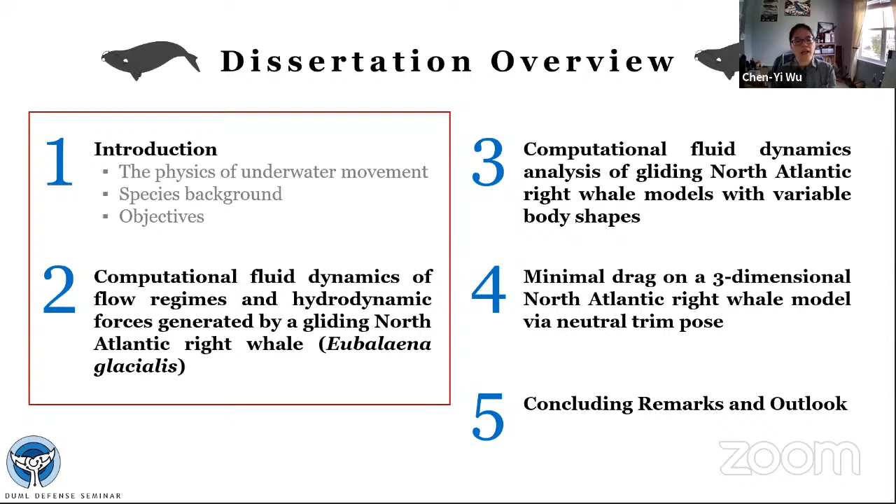So let's get started.

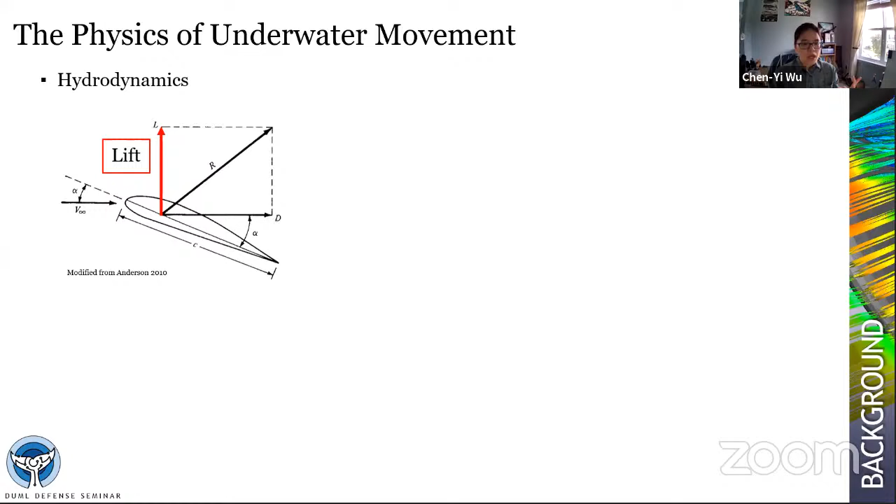So the strength of drag is determined by fluid density, the shape, and also how fast it moves. The smooth outline of the streamlined body shape allows a thin layer of fluid to attach to the surface. Within this layer, the flow remains laminar and incurs lower drag. This rule applies to living organisms as well, since they must overcome drag to move forward in the water.

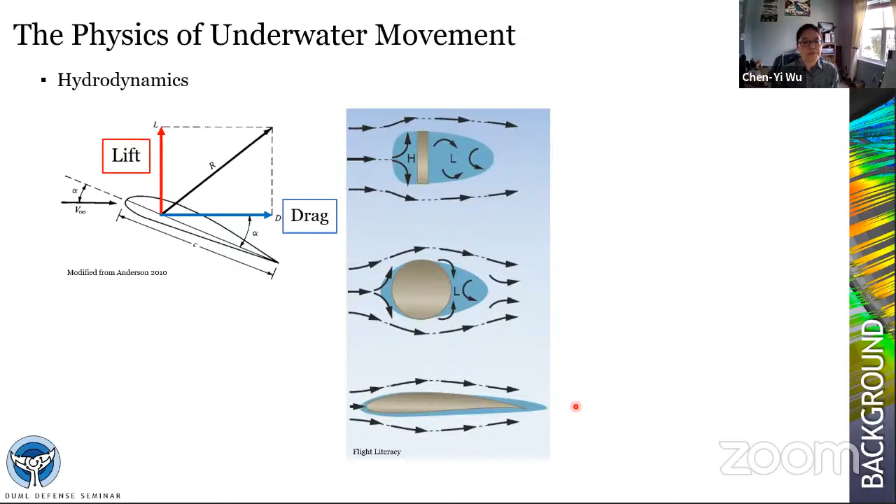Therefore, under selective pressure, the ancestors of modern cetaceans developed streamlined body shapes and transformed limbs to successfully return to aquatic environments. Their morphology delays separation of the boundary layer and reduces drag while they swim.

The total cost of transport is used to estimate the energetic expenditure of aquatic animals, which is the sum of metabolic costs, or say maintenance costs, the rate of oxygen consumed by the animal as they just rest or just respiration, and the locomotor cost, the energy cost for swimming. And I will come back to this in just a second.

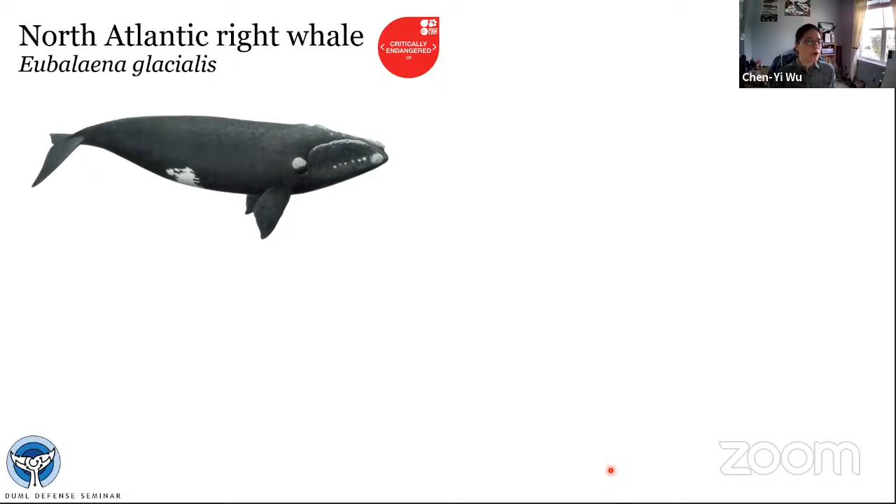The focus of my dissertation is the North Atlantic right whale. The term right whale will be used in the rest of my talk. The right whale is one of the largest whale species. Most right whales are black with some white areas on the belly and chin.

They have patches of rough skin on their head. We call them callosities. These patches, or callosities, are distinctive between each individual right whale. Therefore, this allows scientists to identify different whales throughout their lifespan.

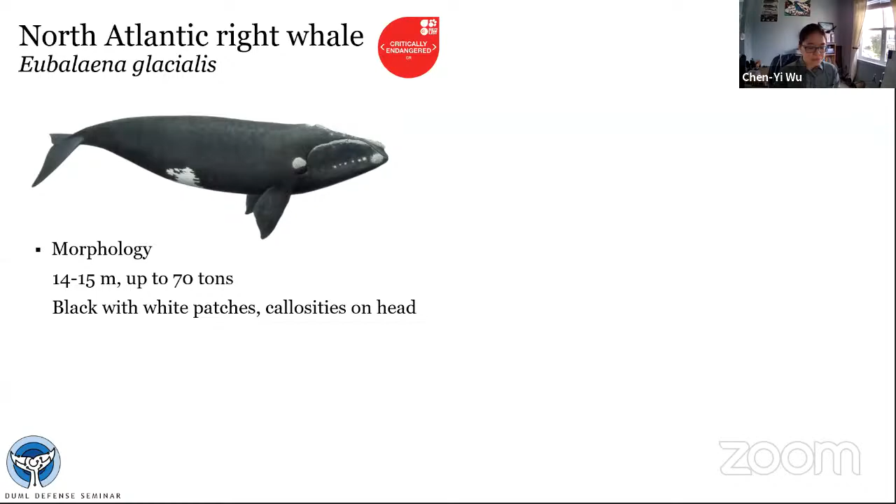In summer, right whales gather in their feeding grounds and forage on copepods with their baleen plates, whereas in winter, pregnant females travel to calving grounds in coastal waters of the southeastern United States to give birth and raise their calves. Right whales were nearly extinct due to commercial whaling.

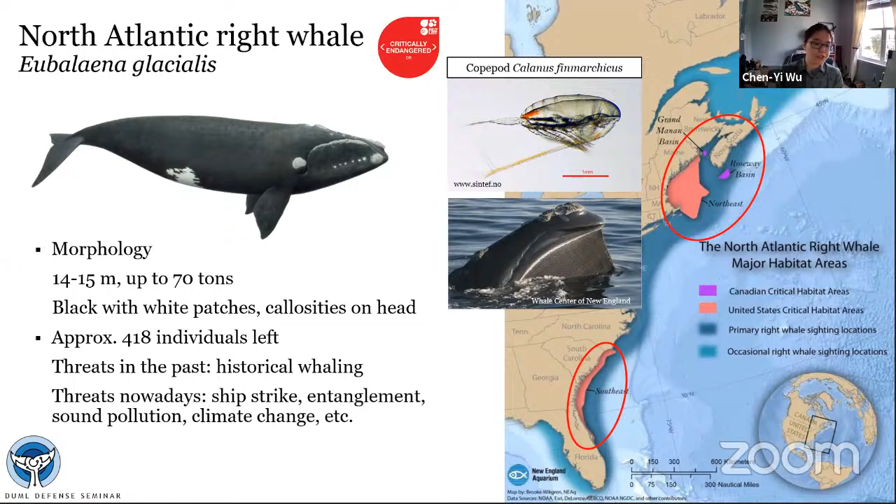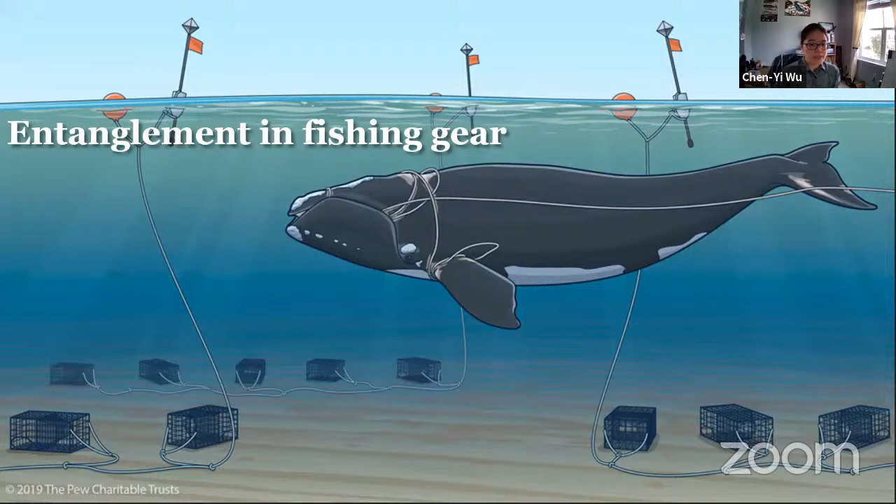However, currently this population is still vulnerable to human activities such as fishery, shipping, and ocean noise, as well as climate change. Among these, entanglement in fishing gear is considered one of the major causes of unnatural mortality of right whales, given the high mortality rates once the animal gets caught in fishing gear, compared to ship strikes. A previous study found that over 85% of the population shows some evidence of encountering fishing gear.

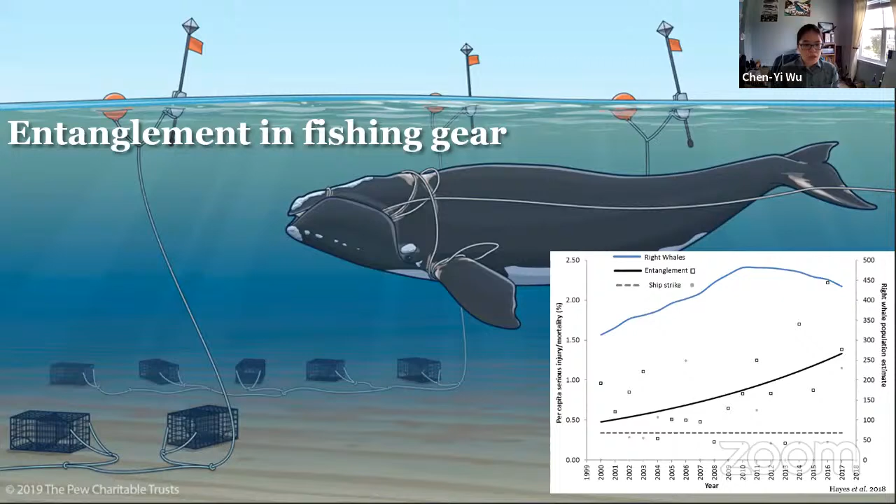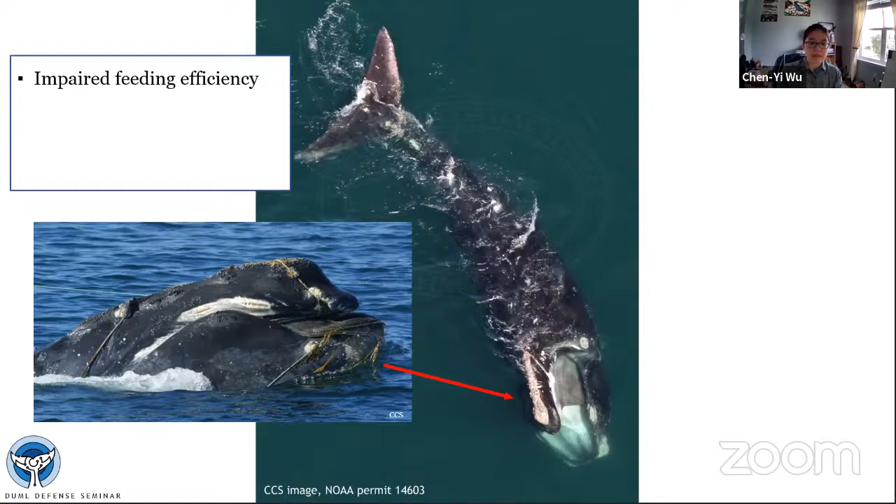Among those affected individuals, over half of them are subject to repeated entanglement, from twice to as high as 7 times. During entanglement events, so we have a right whale here, this animal may end up having impaired physical functions such as reduced feeding capability if the fishing gear is wrapping around their mouth or baleen plates, or injuries due to collisions with fishing gear. Some of those injuries could be lethal and result in mortality of those animals.

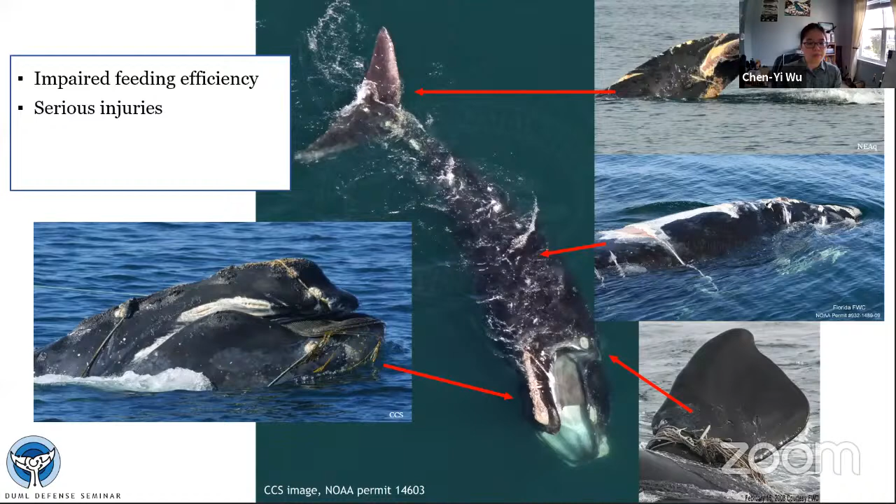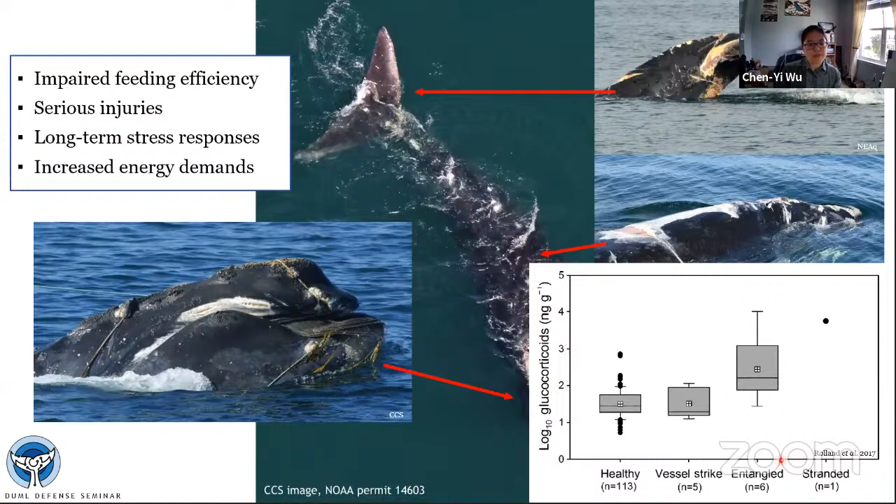Significantly higher stress hormone levels were found in entangled right whales by researchers at the New England Aquarium. Lastly, carrying fishing gear may increase energy demands of those individuals.

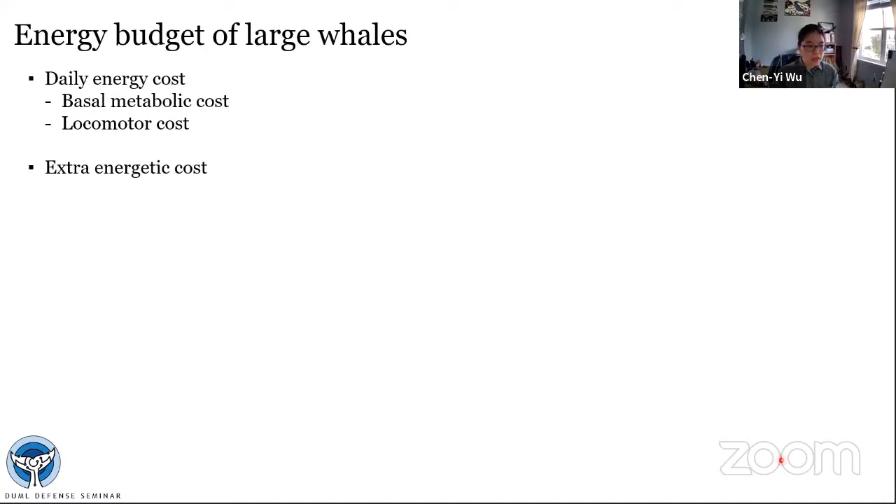Okay, so now I want to talk about the energy budget of large whales. As I mentioned earlier, the daily energy budget of aquatic animals includes the maintenance costs and the locomotor costs. But there are a few other types of energy costs associated with some critical life history events, for example, annual migration of some large whale species, as well as reproduction for females. And also, here I want to draw your attention to entanglement.

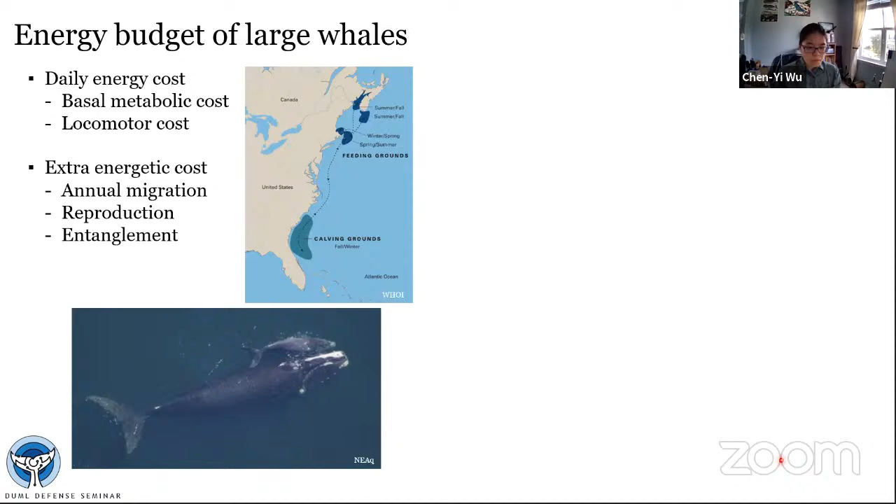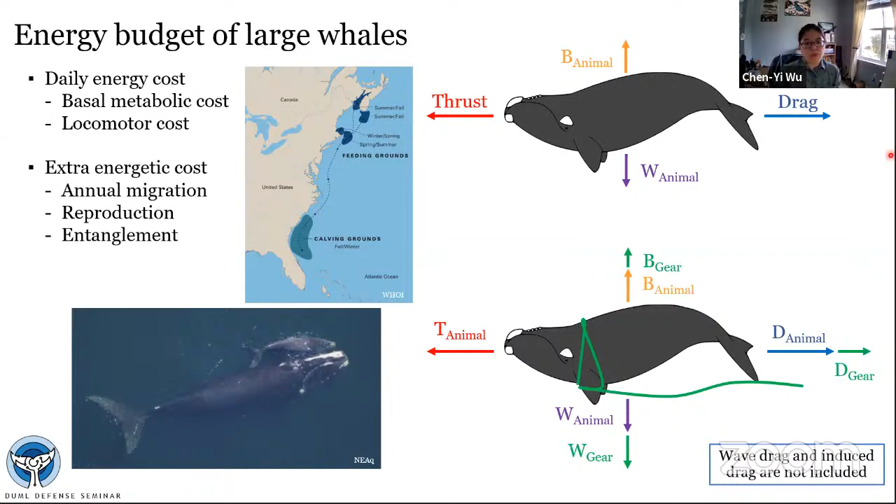So for a non-entangled right whale, free swimming without any gear attachment, its body weight will be balanced by the buoyancy of the animal. As it propels itself, drag will appear, and therefore this animal must generate sufficient thrust to overcome drag. However, once it becomes entangled, the attached gear will also create buoyancy, weight, and drag, and inhibit the movement. This means that the affected animal has to spend extra energy to overcome these additional forces.

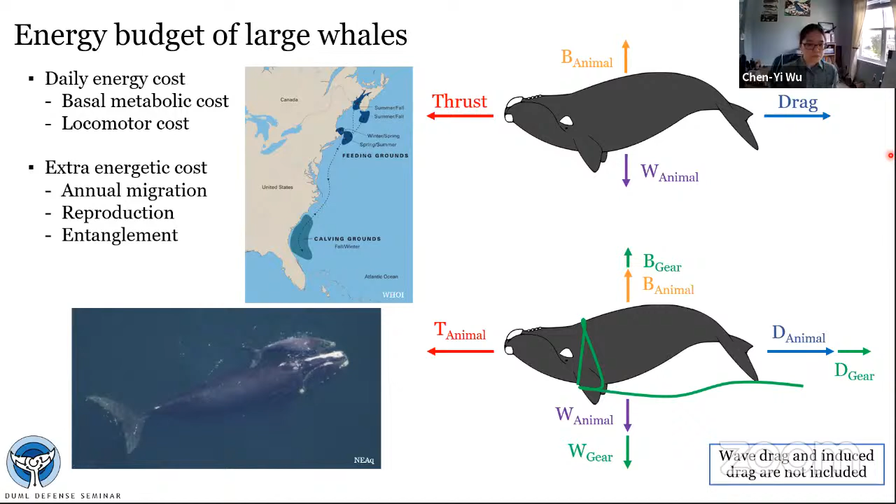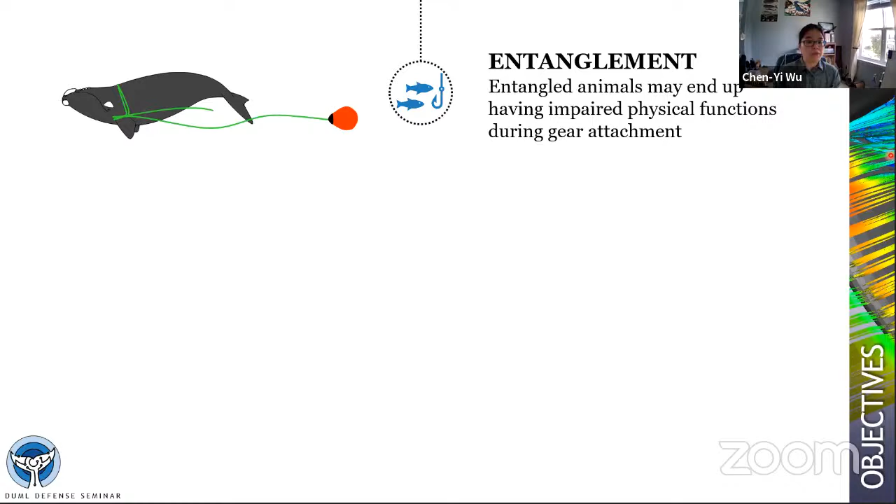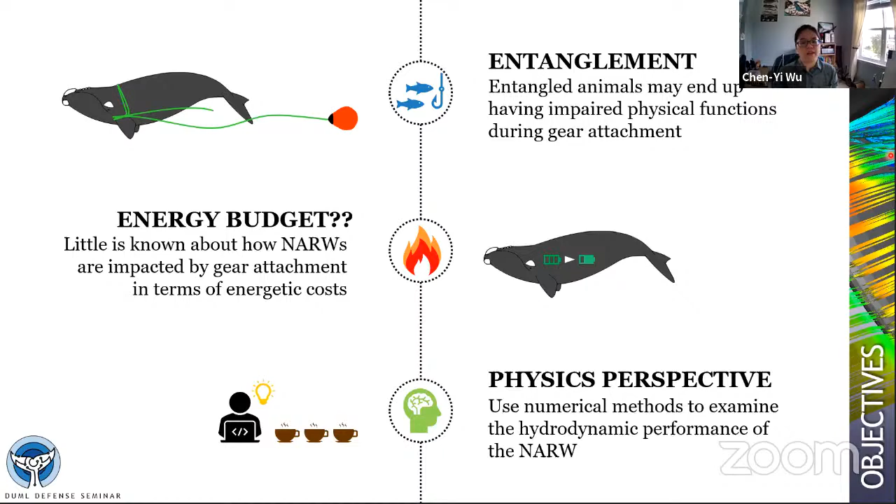So here's the roadmap showing how my research questions were developed. As shown in previous slides, entanglement causes a lot of problems for right whales. However, little is known about how the energy budget of these animals is impacted by such events. Therefore, with an engineering background, my dissertation aimed to understand the hydrodynamic performance of North Atlantic right whales from a physics standpoint.

Knowing the energetic cost of right whales is of interest because once the animal cannot intake enough food, it may not only metabolize its storage fat, but lose its ability to accomplish tasks other than survival, reproduction, for example. And the birth interval for female right whales has increased from 3 to 4 years per calf to over 10 years, and ultimately affects the population.

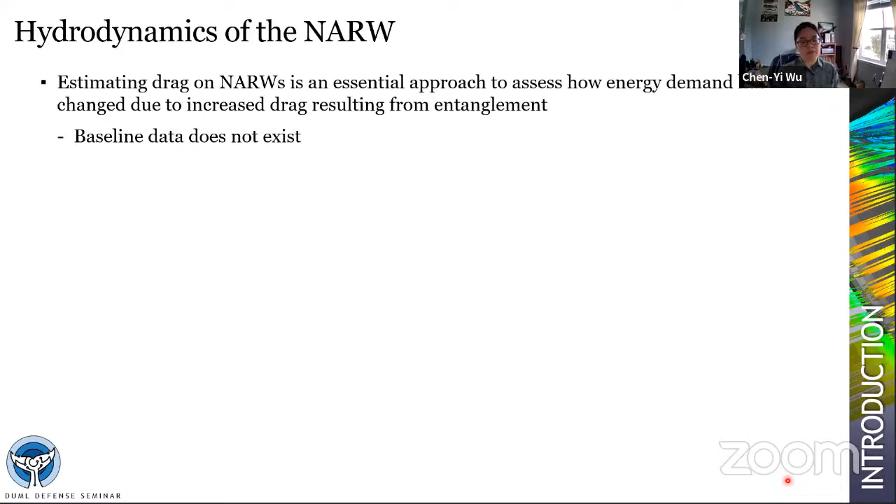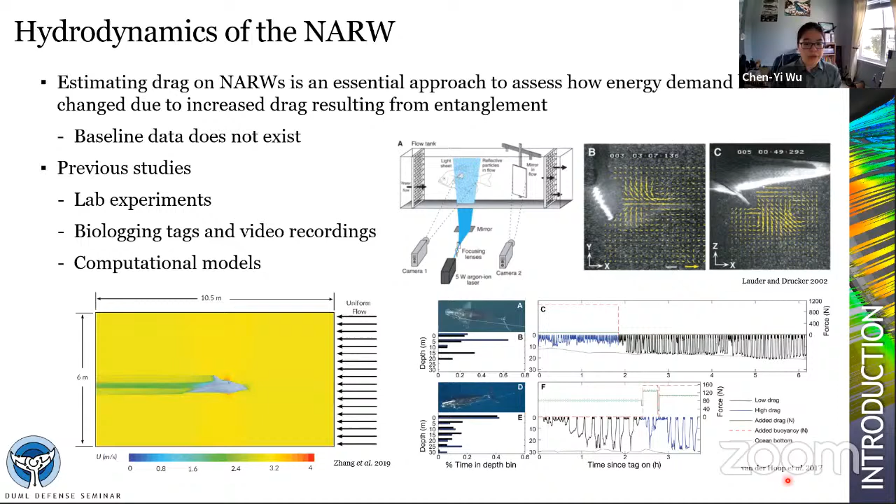Therefore, estimating drag on right whales is an essential approach to assess how energy demand has changed due to increased drag resulting from entanglement, but the baseline data for right whales does not exist. Several attempts have been made to estimate drag on aquatic animals, for example, conducting flow tank experiments on some small species like fish, or recording kinematic data of animals with digital tags and video recording, as well as numerical methods.

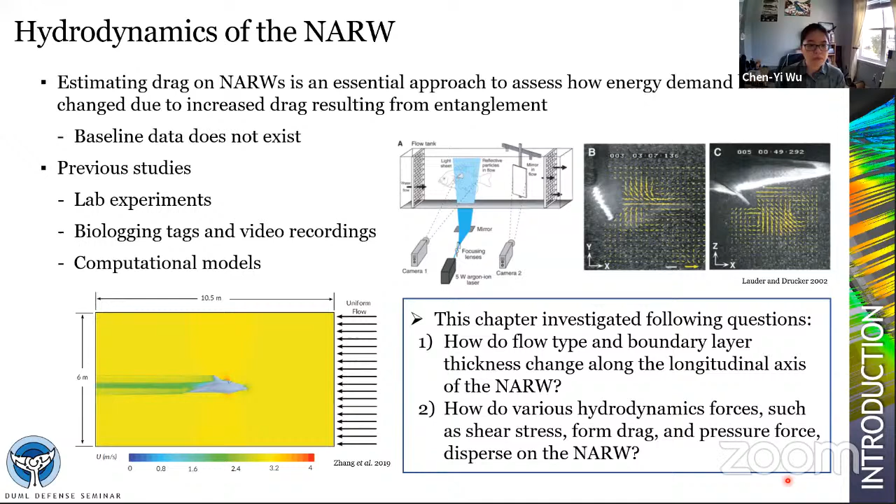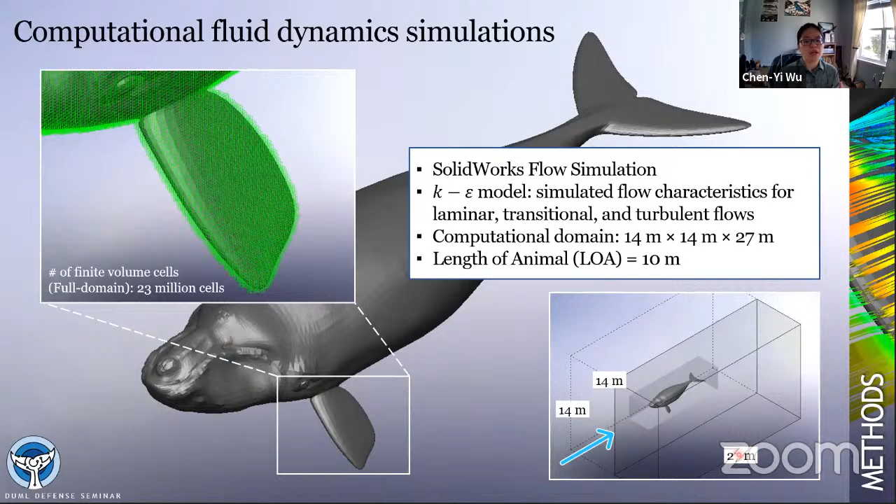One advantage of using numerical methods is that the morphometric parameters of the 3D model can be precisely measured by the software. And those measurements are essential while calculating hydrodynamic forces on the animal. Another advantage of using computer solutions for hydrodynamic analysis is that it allows me to run parallel simulations under a controlled circumstance, such as modifying one variable at a time.

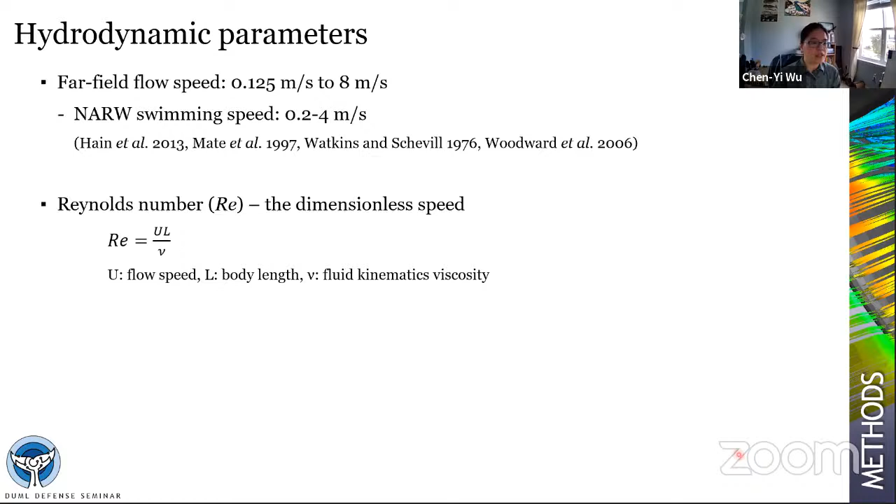So to estimate the baseline forces on the right whale model, speeds covering the known right whale speed range were applied to the CFD model as the flow velocity, while the right whale model remains static in the fluid domain. The dimensionless speed is given by a Reynolds number, and drag coefficient was used for reporting dimensionless drag. By calculating those dimensionless parameters, I was able to compare between different simulations.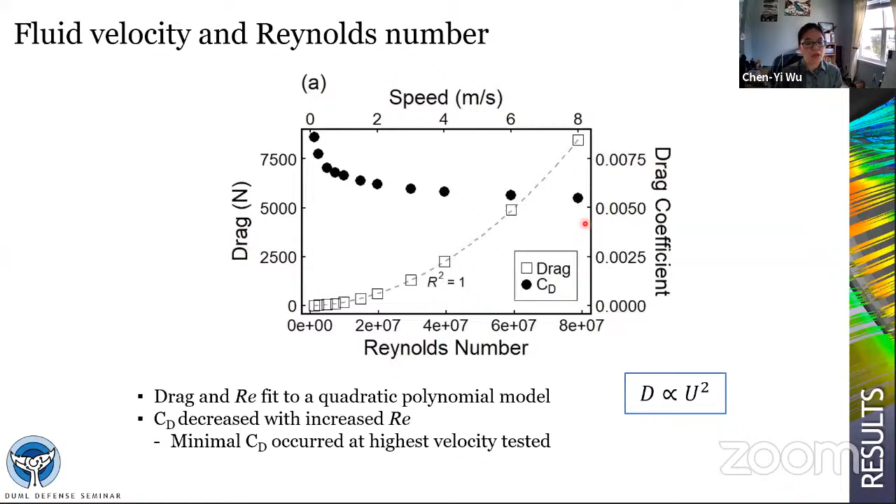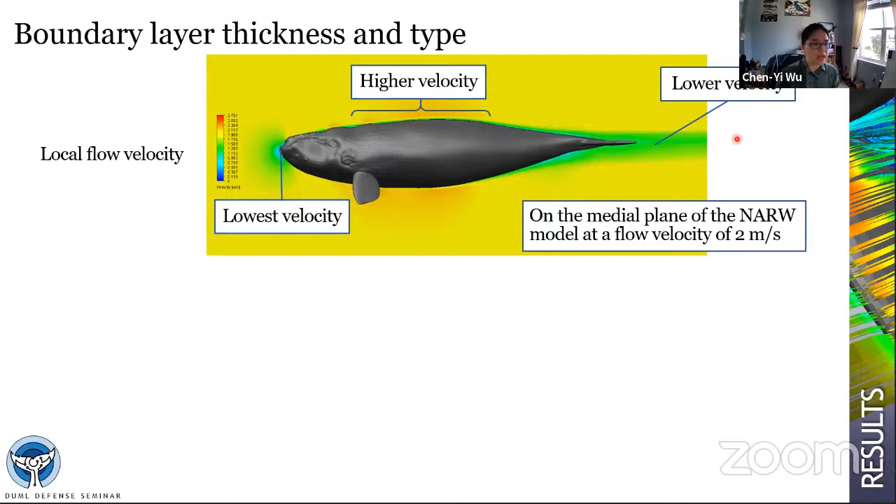Local flow velocity on the medial plane of the right whale is shown here. The boundary layer attaching to the animal can be distinguished from the surroundings by the visualized flow velocity over the animal. Here is a very thin layer of green color on the animal, and that suggests that the flow in those regions is slower and laminar. The thickest boundary layer was found at the lateral side of the peduncle, just after the body, whereas the boundary layer around the appendages, like flippers and flukes, was the thinnest.

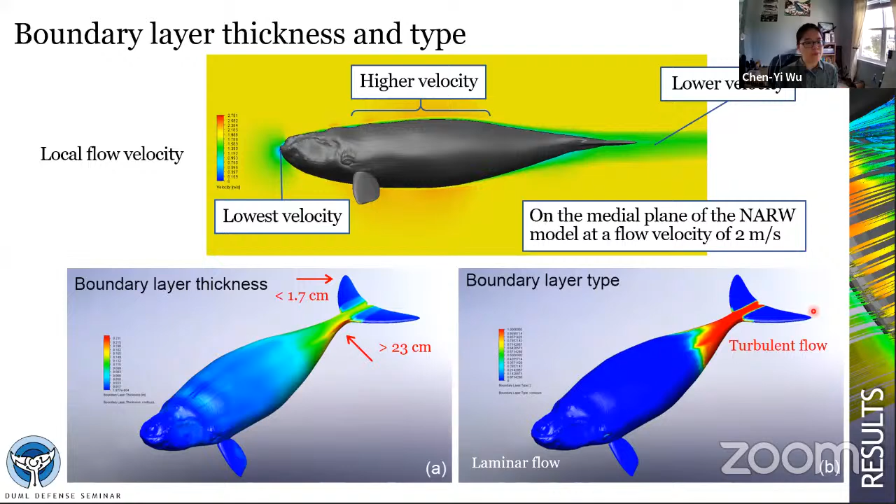Flow was laminar from the rostrum, the tip here, to approximately 60% of the animal length, and was fully turbulent from around 80% of the animal length to the fluke notch. Note that laminar flow occurs at the surface of the fluke, just outside of the body wake region.

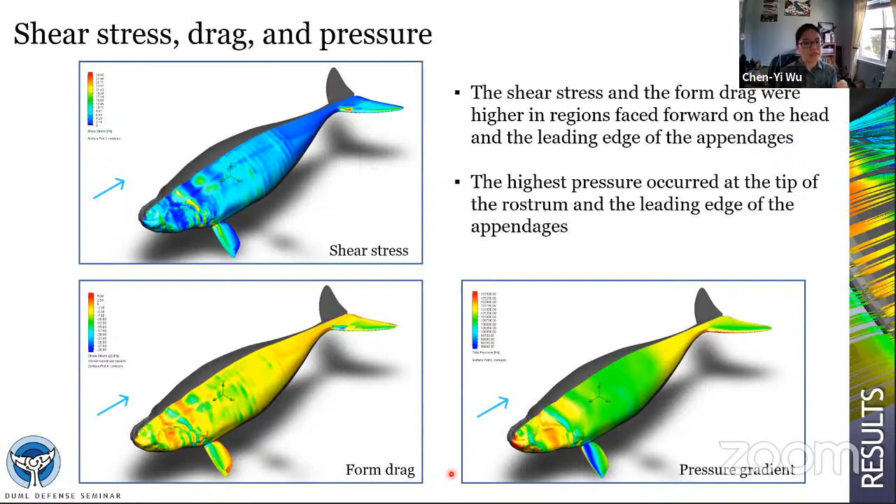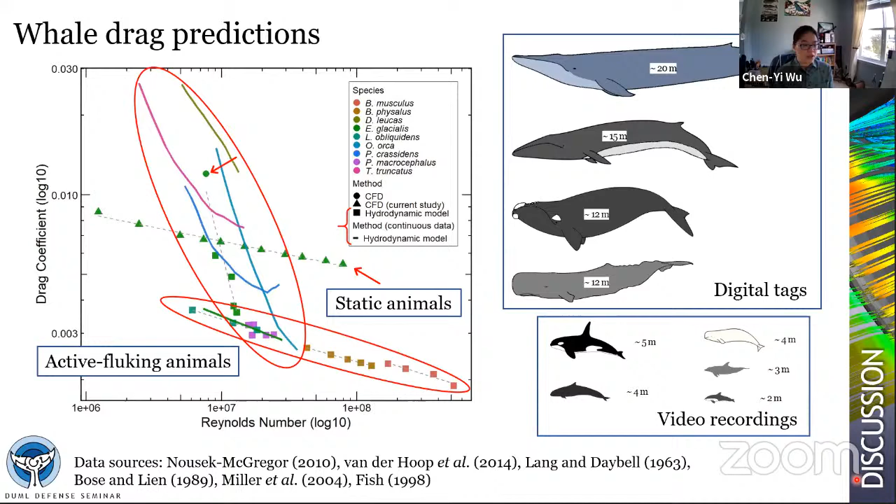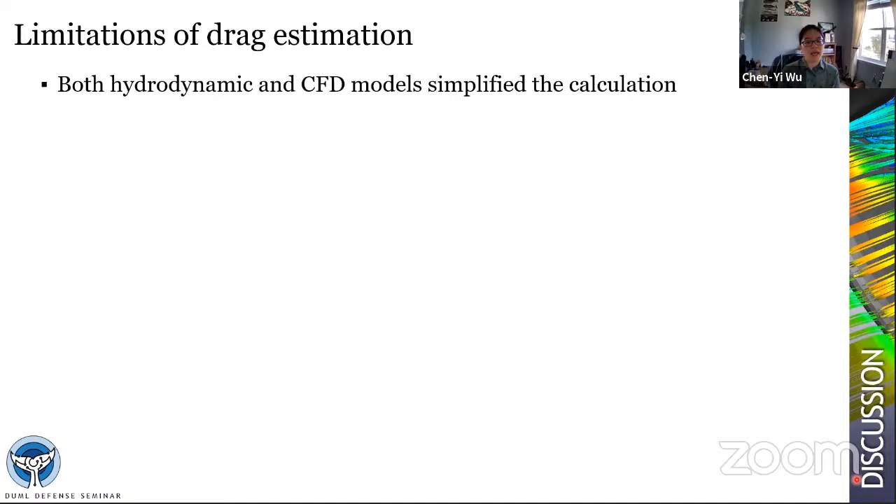Therefore, it is important to bear in mind the simplified calculations undertaken by both hydrodynamic and CFD models. For example, in the cases of estimating drag with hydrodynamic models that use data collected with video recordings or digital tags, the outcome forces comprise not only the small scale flow circulation on the animal, but also other factors such as waves if the animal is close to the surface. In addition, those physical factors in the real world are ever changing, which implies that such drag estimations are correct, but only under certain conditions, not others.

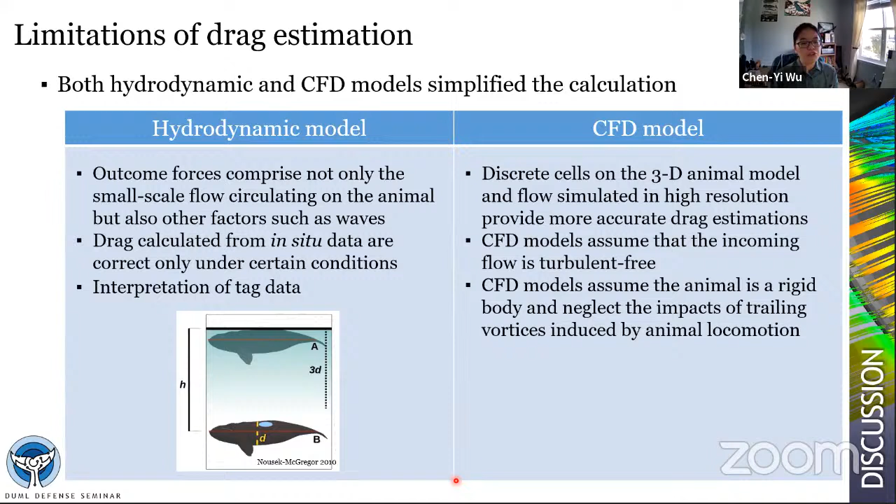Lastly, interpretation of tag data may be performed differently between research groups. On the other hand, CFD models provide more accurate drag estimation because the morphometric parameters of the animal can be precisely measured by the software. However, this model assumes that the incoming flow is turbulence free, which apparently is not the case in nature, and that the animal is a rigid body without flexibility or maneuverability, and neglects the impact of trailing vortices induced by animal locomotion, which again is definitely not the case because they are animals and they do all kinds of different behavior in water.

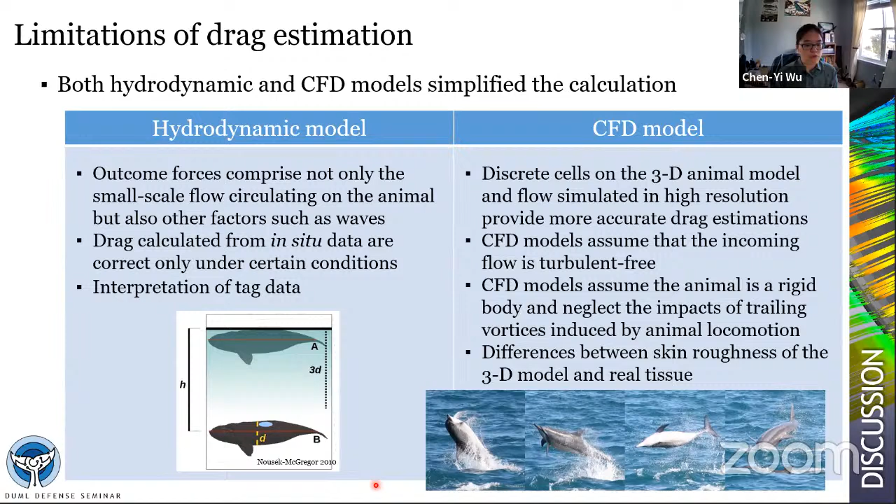Lastly, differences between skin texture, or roughness, of the 3D model and real tissue suggest bias in the calculation of friction force. To sum up, this is the first comprehensive study of drag and other hydrodynamic characteristics of right whale through a CFD approach. Force distribution generated by CFD simulations suggests that hydrodynamic forces on right whale vary with position on its body due to the irregular outline of the animal. This finding prompts me to wonder how body shape affects the hydrodynamic characteristics of right whale. So a follow-up study was undertaken to answer this question, which will be talked about a little bit in the next chapter.

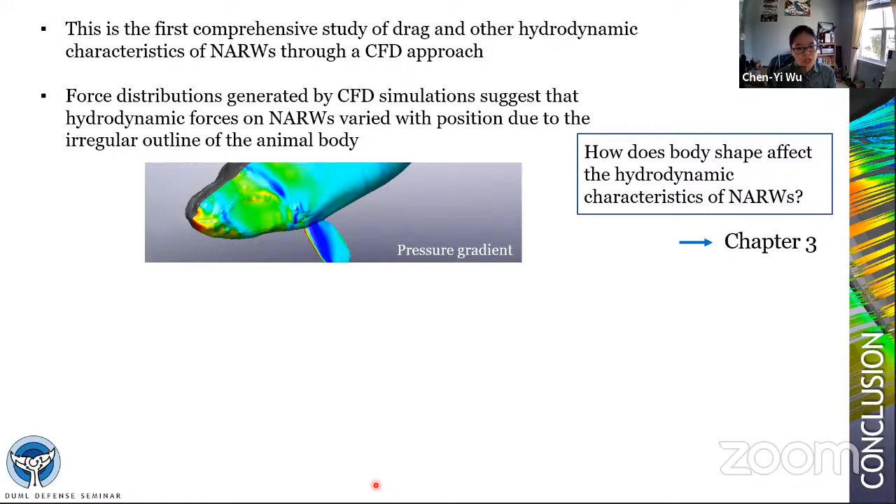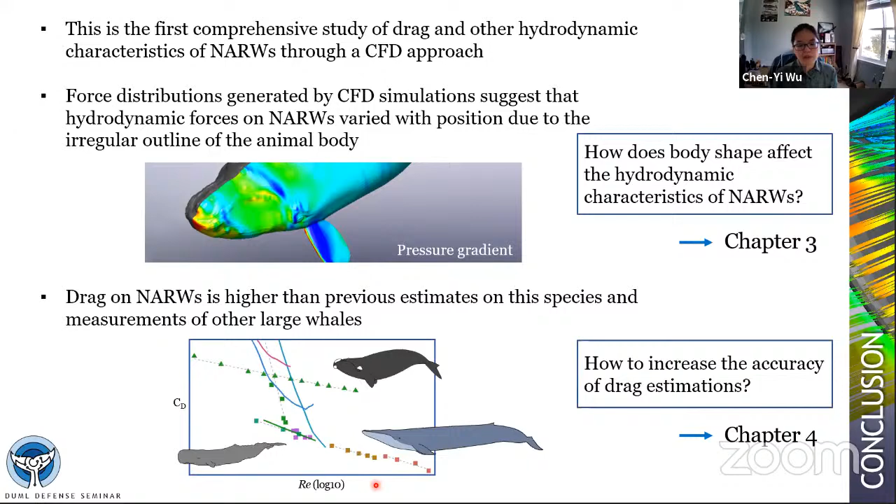Secondly, it was found that drag on right whale is higher than previous estimation on this species and measurements of other large whales. Although a comparison between different models and some limitations were discussed in this chapter, my last part of the dissertation is trying to investigate how we can increase the accuracy of drag estimation while using numerical methods. For the interest of time, in the next 10 to 15 minutes or so, I will only be showing you the key findings of the rest of my work.

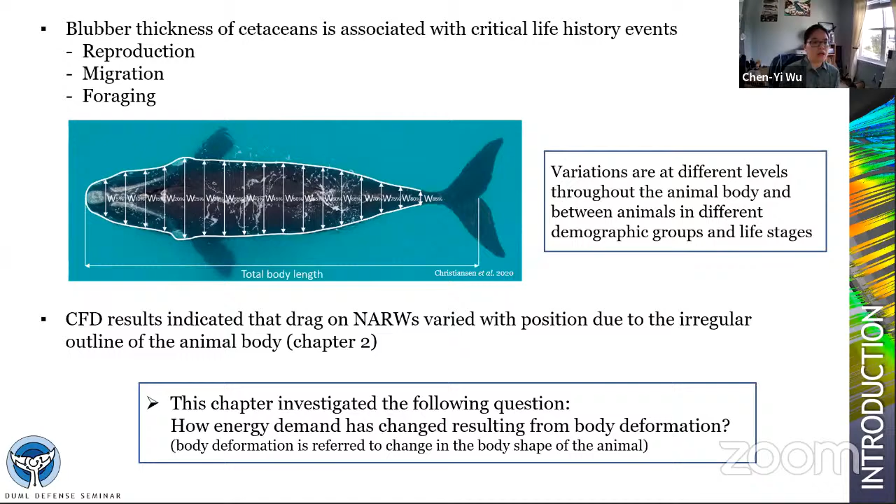So the third chapter of my dissertation investigated the impact of body deformation on the energy budget of right whale. Here, body deformation is defined as change in body shape of the animal, which was found to vary at different levels throughout the animal body, shown in the image, and also between animals in different demographic groups and life stages, such as juveniles or adult females, or whether they are pregnant or not. I used images of an emaciated right whale to modify the original 3D model, thereby creating a right whale model with imperfect body shape.

Given the limited number of archived images demonstrating body shape of emaciated right whales, this emaciated model was not a replica of any specific animal, and it only exhibits the post-nuchal concavity highlighted in the red square, with additional circumferential losses of body fat, based on the photo that I got. Exact changes in the contour of the ventral side, as well as mid-body region and peduncle, were not the focus of this work. Likewise, a pregnant right whale model was built as described in the previous study done by a student in Nowacek lab, and then normalized to the same size for comparison.

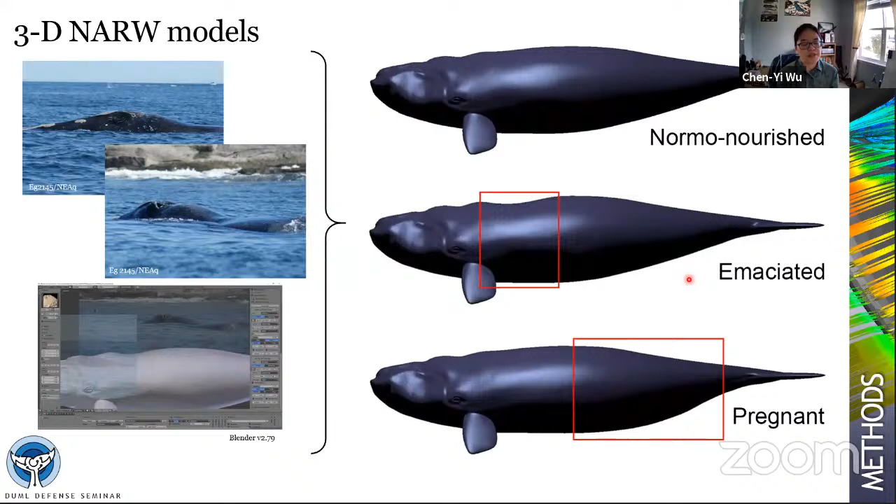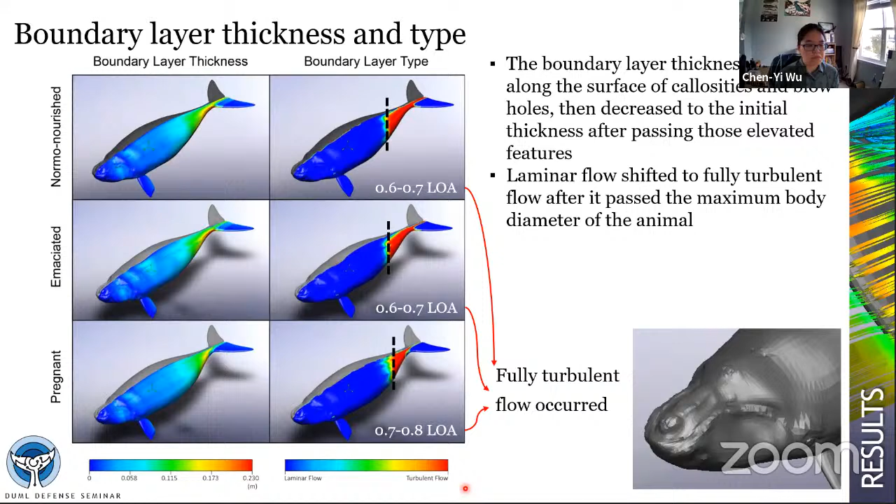Simulation results on all three models show that laminar flow shifted to fully turbulent flow after it passed the maximum body diameter of the animal. However, I noticed that there's a delayed occurrence of turbulent flow on the pregnant right whale model, which could be due to their enlarged girth because they are bearing a baby whale in their abdomen.

Second, the boundary layer thickness and form drag slightly increase within the post-nuchal concavity, which is circled here. By comparison, you can see the color is a little bit warmer, indicating the boundary layer thickness is a little bit larger on emaciated animals. And also you can tell the differences on this figure showing the form drag of the post-nuchal regions of the emaciated animal.

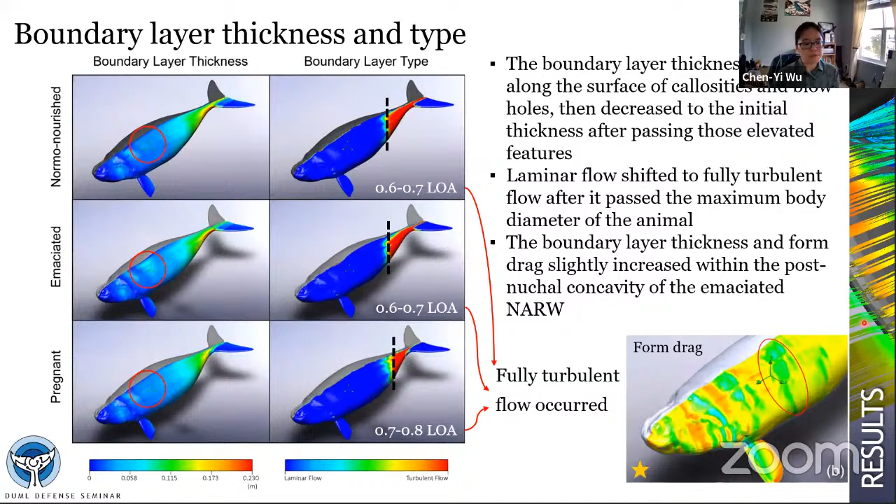Based on the simulation, drag generated by a gliding right whale is influenced by its body shape, but the changes are minor. I found that the pregnant right whale experienced the lowest drag coefficient, which is possibly due to this individual being able to maintain a favorable pressure gradient and thereby delay flow separation and cause lower drag.

Whereas the emaciated right whale encountered the highest drag coefficient, possibly due to the concavity at its post-nuchal region, as shown in the previous figure, with higher drag and higher boundary layer thickness, which increases the surface area that faces incoming flow, therefore higher form drag, and potentially disrupts the boundary layer on the animal.

And what I was not showing here was the locomotive power comparison between the models and some measurements done by previous studies. So by comparing such differences in locomotive power required by the right whale models, only little differences were found. And such differences were even smaller when compared to the total energy expenditure of free swimming right whales calculated by previous studies, considering the energy consumption rate in their foraging ground as well as their cruising speed.

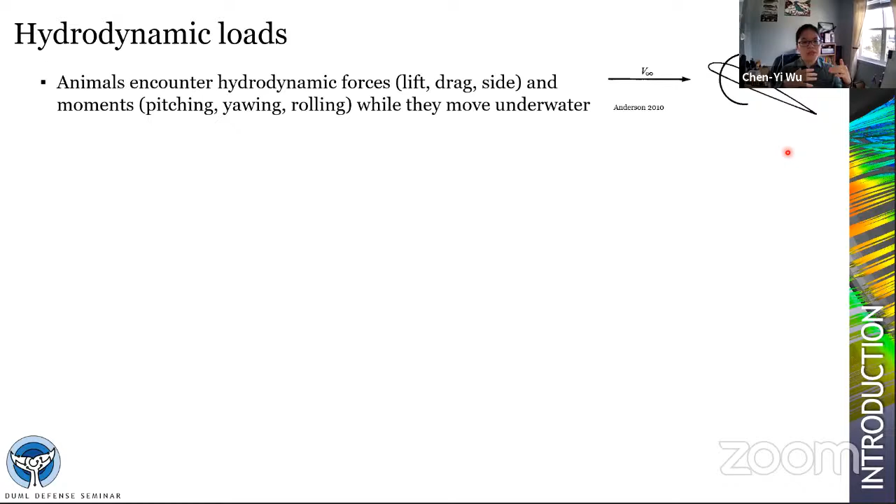So shown here in this diagram, moment is a measure of the tendency to rotate an object about a point or an axis, because the forces cannot be balanced, so the object will tend to rotate. So shown here are pitching moment about the x-axis, rolling moment about the y-axis, and yawing moment about the z-axis.

Aside from the success in morphological evolution I talked about in the introductory chapters, it has been well documented that animals developed a wide range of strategies to reduce energy expenditure in both terrestrial and aquatic environments. For example, formation flights in some bird species and fish schooling, as well as bow riding of dolphins.

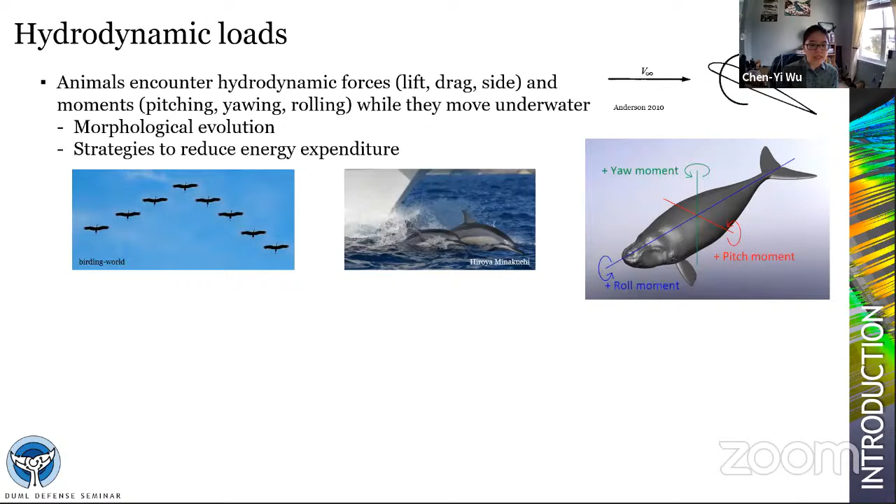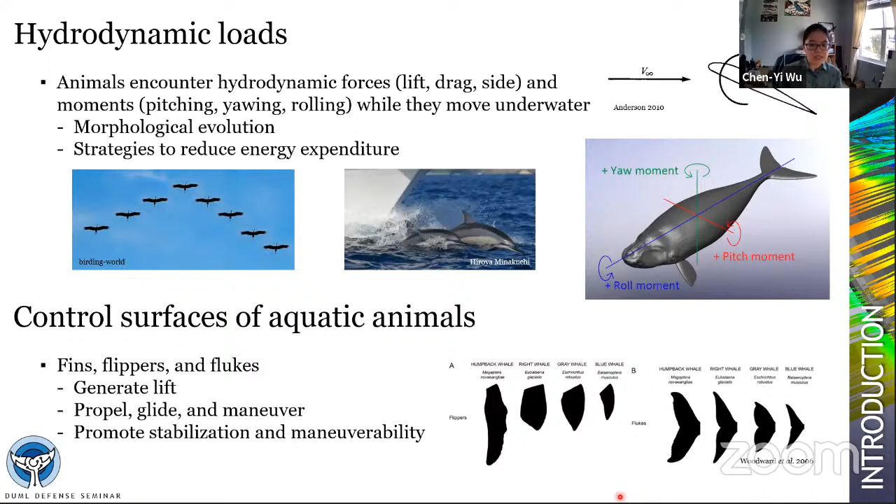And aquatic animals exhibit control surfaces such as fins and flukes for moving in fluid. However, these surfaces not only provide stability and maneuverability, but also additional drag. We call it parasitic loads.

So this diagram shows the hydrodynamic forces on the flippers and flukes of the right whale and the moment arms associated with each force. All moments were calculated with respect to the center of volume of the right whale model, because this model was assumed to have a homogeneous mass distribution, therefore the center of volume is approximately the center of mass, which we use to calculate the moment acting on the animal.

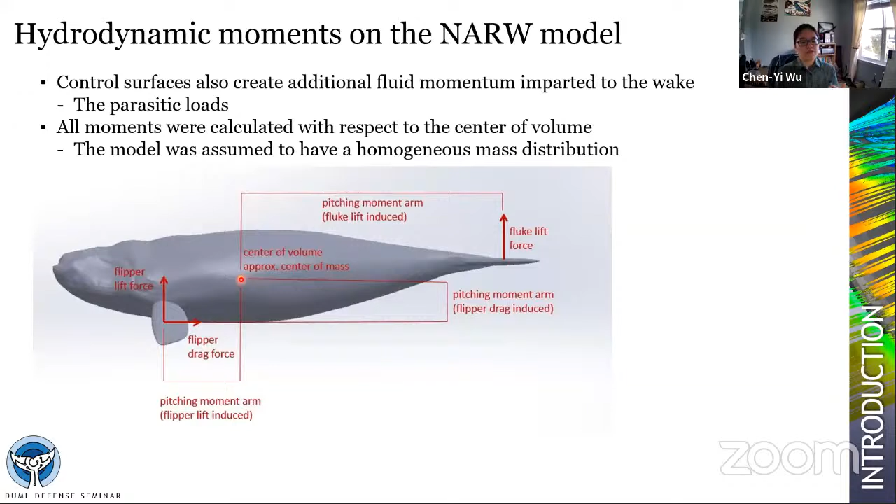I should mention that, in theory, drag will occur on the fluke as well. However, after the body pose of the right whale model was manipulated in this chapter, the fluke drag was approximately in line with the center of volume. So the moment arm vanished and there's no moment resulting from fluke drag.

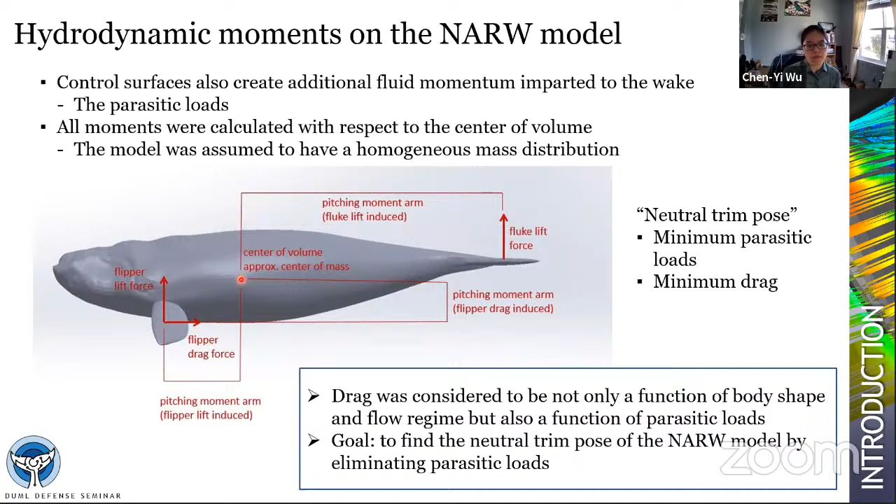A model is considered in its neutral trim pose only if the parasitic loads are minimized. Hence, the goal of this chapter is to find the neutral trim pose of the right whale model by adjusting its body pose. In order to execute different body poses, the mesh model was embedded with multiple bone segments, so its joints can be rotated in certain dimensions.

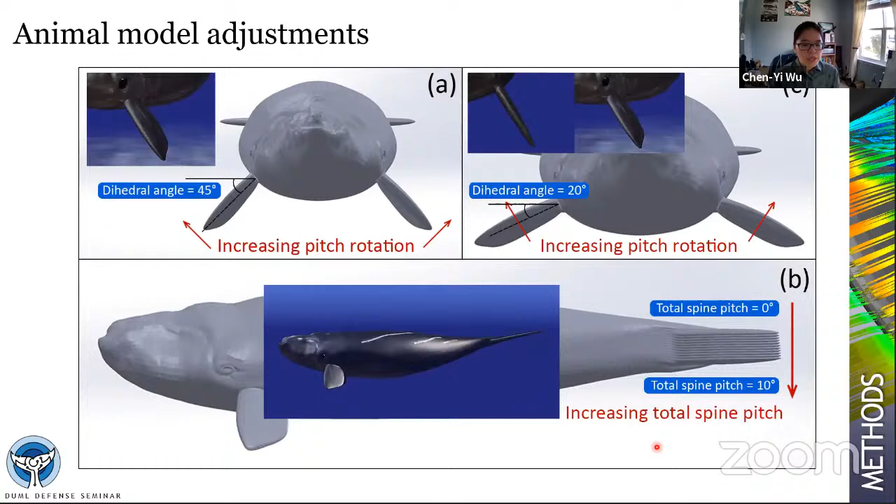Three scenarios were tested: first, adjusting the flipper pitch angle; second, adjusting the total spine pitch angle of the animal; and the last one, adjusting both flipper dihedral and pitch angles. Note that in the second scenario, the flukes remain horizontal in this work. So at the end of each scenario, the optimal position of the body parts was applied to the subsequent simulation. By doing so, the effect of each variable can be diminished.

However, due to computational complexity and the expense of each simulation, it was assumed that changes in one of the scenarios did not affect the other. In other words, we did not go back to check the force distribution on the model after we completed the later simulation.

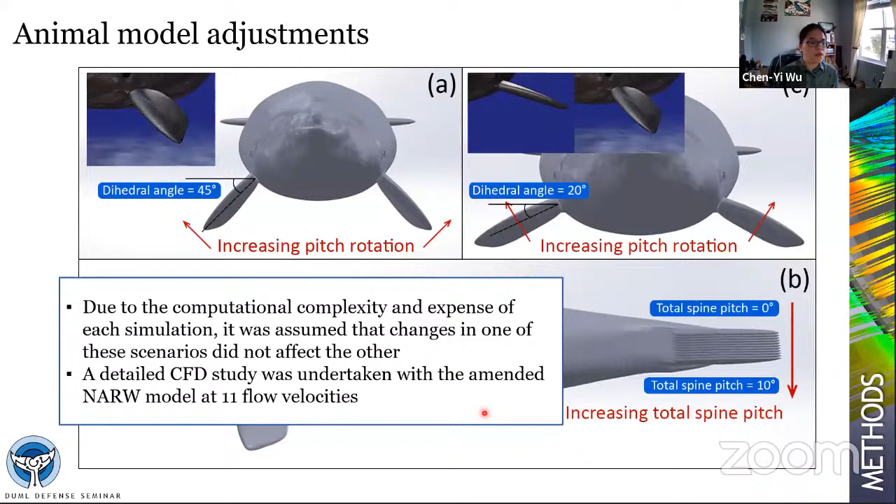After all three scenarios were tested, a CFD study was performed with the adjusted right whale model at 11 flow velocities, as I did in the second chapter.

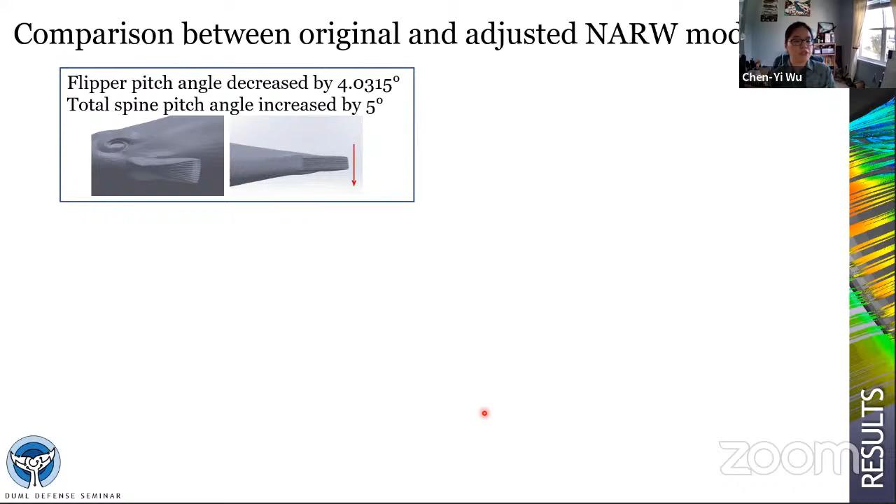So based on the estimation from the free scenario, the flipper pitch and total spine pitch angles that provide minimal drag and pitching moment were adjusted on the original right whale model. And this plot shows the comparisons between original and adjusted model after body pose adjustment.

Lift on the right whale model decreased by 50% to as high as 90%, whereas drag decreased by 10% across all speeds tested, and pitching moment decreased by 61 to around 90% in either direction. Here, I only consider the tendency of rotation, so I use the absolute value of pitching moment to calculate the differences.

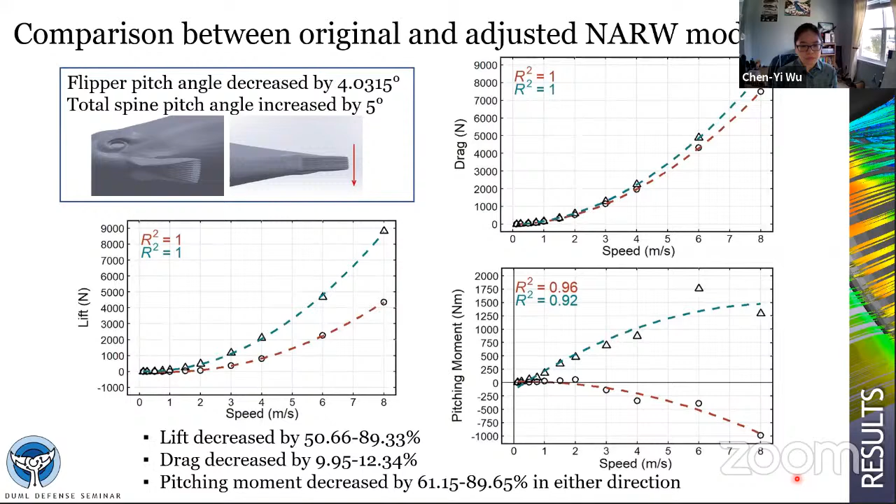So the simulation results suggest that cetaceans are able to balance pitching moment or other parasitic loads by adjusting their appendages accordingly. And the hydrodynamic drag was calculated approximately 10% lower than the previous estimation provided in the second chapter, where the flippers and spine of the model were positioned at an angle of 0 degrees relative to the free stream flow.

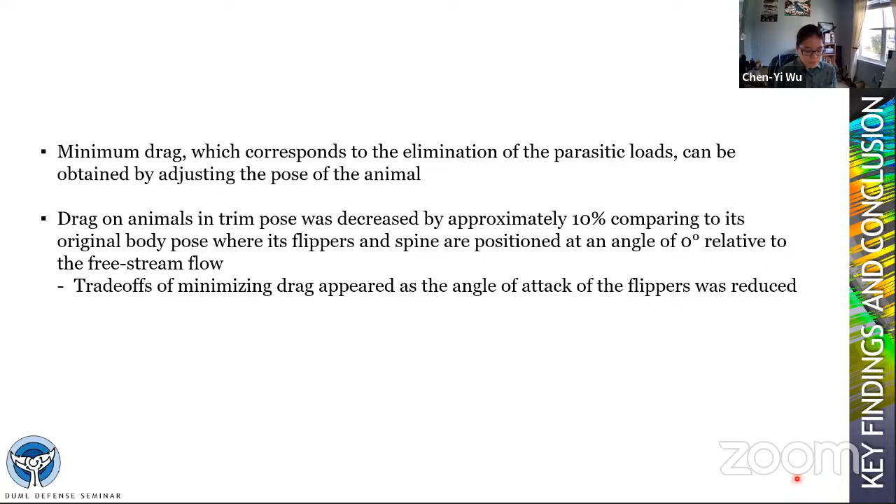However, trade-offs of minimizing drag appear as the angle of attack of the flipper was reduced, because we found a dramatic decrease of lift production while we adjusted the angles of the body parts. And this is especially important if someone wants to investigate hydrodynamic performance of animals with negative buoyancy, for example, sharks. So on one hand, we would like to minimize the parasitic load. However, while doing so, lift production will also be decreased, and those like sharks have negative buoyancy and need to spend extra energy to keep themselves afloat.

And lastly, because animals may balance parasitic loads by modifying their swimming behavior or body pose, for studies investigating the impact of digital tags attached on the animal, it is necessary to identify the neutral trim pose to eliminate artificial perturbance, because without identifying neutral trim pose, if we run the CFD simulation, we will actually get higher drag than what the animal actually experiences in water, because they will try to adjust their body parts and minimize such load.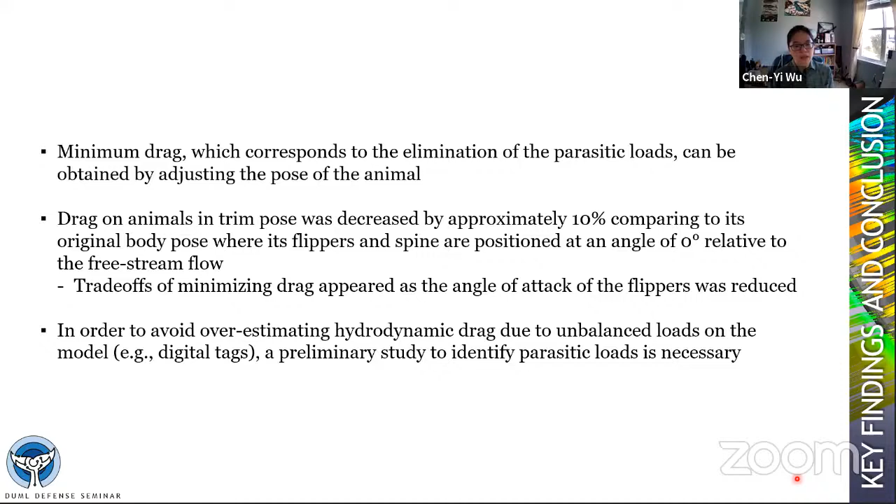Okay, so for my dissertation, I examined the capability of computational fluid dynamic modeling for studying the hydrodynamic characteristics of the North Atlantic right whale. And those results are presented here in this talk. The major findings of my work include, first, CFD modeling is a practical approach to study hydrodynamic performance of cetaceans, especially if those animals are enormous and cannot be found in an aquarium. Sometimes you can use digital tags, but in this work, I try to use a different approach to study hydrodynamics of these animals.

And I found that changing body fitness will slightly affect the cost of locomotion of the right whale when compared to some energy budgets estimated in the field. And lastly, it is necessary to find the neutral trim pose of any given animal model before measuring the parasitic loads, for example, lift, drag, and pitching moments, as I discussed. Since animals may adjust their body pose to eliminate those drags, if we don't use the neutral trim pose to run the CFD simulations, we may overestimate the force on those animals.

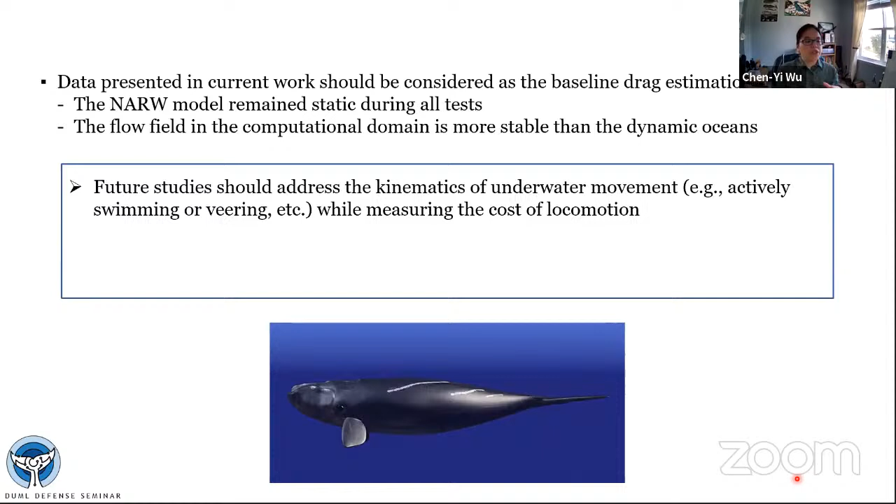However, please keep in mind that data presented in the current work should be considered as the baseline drag estimation, because the right whale models remain static during all tests. On top of that, the flow field in the computational domain is more stable than the dynamic ocean. Therefore, future numerical studies should address the kinematics of underwater movement, especially actively swimming animals or as they maneuver in an underwater environment, while measuring the cost of locomotion.

In addition, extra parasitic loads caused by attached gear during entanglement, as well as possible injuries due to collisions in such encounters, should also be considered when evaluating the energy budget and population health of the North Atlantic right whales. Although some of these issues have been investigated with tag deployment or photogrammetry, other methods should also be tested and compared with existing measurements.

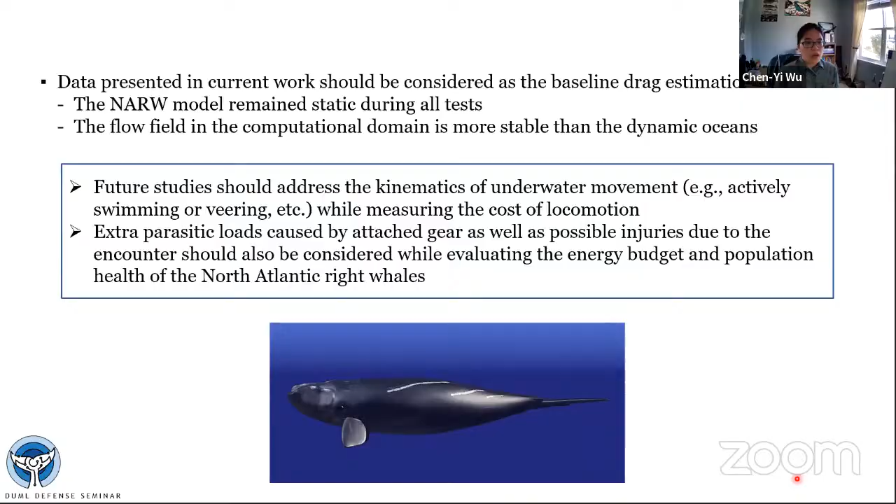With that, I'd like to thank my co-advisors, Doug and Laurens, for picking me up and making me travel here all the way from tropical small islands on the other side of the earth. And also thank my committee members, Frank, Brian, and Julie, who were always nice to me in the past few years; some of us even met annually at conferences and talked about the work and how it can improve. Also members of the Nowacek Lab, especially my counterpart, Jillian, who joined the lab with me at the same time and supported me, because we are at the same stage. We did a prelim even on the same day.

So we share a lot of pressure, anxiety, and happiness together. And also Dave, Anna, and Rose, who helped me a lot on some tag data analysis, although I did not include such results in my dissertation. But without that, I wouldn't be able to get to know the mechanics of how we can use tags to understand the movement of the animal.

And also Howle Lab alumni Greg, who also helped me a lot when I was first year at Duke and trying to get into coding stuff and hydrodynamics. So along with people within SuperPod, Andy Ree, Joe, Vivian, Will, and Brad, who helped me doing my prelim because some of them have physics background. So being in an environment with a lot of people who just know biology, it's really helpful to have their input in my work. For field work, I was taken care of by Zach and Heather.